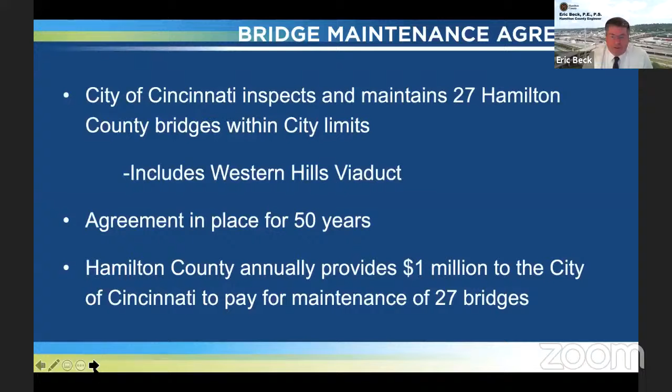This major infrastructure project creates jobs, impacts growth, and spurs development, not just on the west side of Hamilton County, but to all the residents of Hamilton County and the tri-state area. This project is a great example of good governance. When we work together, the outcomes benefit all. The Hamilton County Engineer's Office has a long-standing relationship with the city's Department of Transportation and Engineering. Part of this relationship is an agreement to commit $1 million of municipal road funds annually to 27 bridges within the city of Cincinnati. One of these bridges is Western Hills Viaduct.

Some of the projects that have been recently completed with this relationship are the 8th Street Viaduct, Marburg Avenue Bridge, and Kennedy Avenue Bridge. Tonight, we're here to update you on where we stand with the Western Hills Viaduct project. It is the largest project my office has undertaken, both in complexity and cost. Comments from previous public hearings, as well as those from our other partners, the Ohio Department of Transportation, the railroads, and public utilities, have also weighed into the decisions made in getting the design to the point that it is now. I would like to stress that the images you'll be seeing are just renderings at this point. During the final design, there may be changes made for any number of reasons, including potential input received as a result of the meeting tonight. Again, thank you for being here.

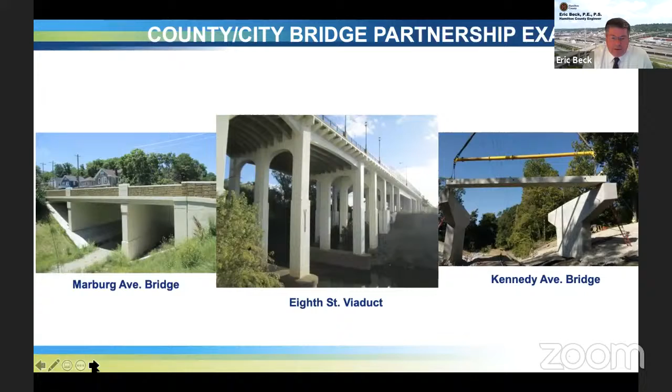And now I'd like to turn it over to Bill Shefcik to discuss the details of the structure. All right, thank you, Eric. Hope everybody can hear me, and good evening. Thank you to all who are participating tonight. So in our presentation, we'll be talking about a few things. First, I want to touch on the current condition of the viaduct. Second, we'll talk a little bit about the history of the project and the status of the project where it is today.

Third, we'll be talking about the recent study done by our consultant, T.Y. Lin, to determine the best bridge type to replace the existing viaduct. And finally, we'll talk about what's coming next, like status of funding, and then we'll be here to answer any questions you may have.

So to start with, we'll talk about the condition of the viaduct. The first thing I'd like to say and stress is that the viaduct is safe for the traveling public. Our intention is to keep the viaduct safe and operational until we can get a replacement structure in place. We are vigilant in performing inspections and doing maintenance several times a year to ensure the safety of the viaduct and the traveling public.

Recently, there were weight limits posted on the viaduct, which are restricting very heavy trucks from using it. At this point, it's only heavy trucks. We're not reducing any buses or any other normal truck traffic, even semis. It's just the very heavy trucks that are limited to use the viaduct.

Shortly we will be installing some netting on the viaduct over the lower deck to help catch debris from falling onto the lower deck. So the viaduct is considered to be in poor condition. As many of you probably know, it's 88 years old. It's at the end of its useful life, and it needs to be replaced.

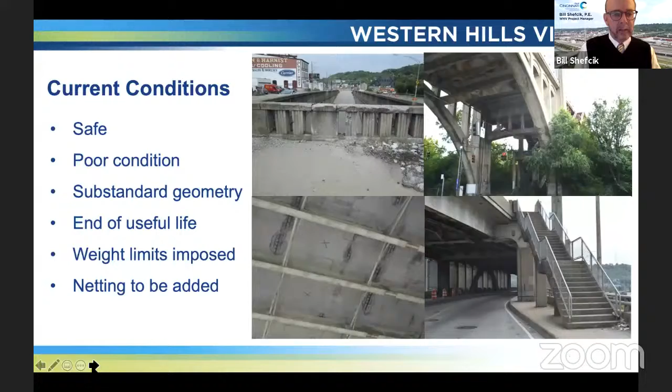So a little bit about the history. Back in 2010, the city and the county began planning on how to address the issue of the aging viaduct. Following 2010 and over the 8 years following, considerable study was made with input from the public and key stakeholders to decide what to do with the viaduct. At the end of that study period, it was decided that the best option was to replace the existing viaduct with a new bridge immediately to be constructed south of the existing viaduct.

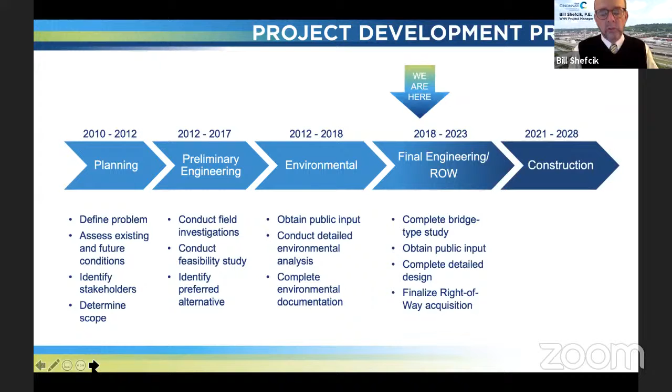The timeline we're showing here on the slide shows where we're currently at in the life of the project. And as you can see right now, we're in the final engineering, final design phase of the project. So I'd just like to say, although no physical construction has started yet, there's been a lot of good work done to date on the project, including our pursuit of funding, which I'll speak about a little later in the presentation.

The new bridge will be constructed approximately 50 feet south of the existing viaduct. By constructing the new bridge to the south, it allows the existing viaduct to remain in place and open to traffic for the majority of the bridge construction, reducing impact to traffic and inconvenience to the traveling public while the new bridge is being constructed.

The new bridge will be a single deck with 4 lanes of traffic in each direction. There will be an 8-foot sidewalk on the north side of the new bridge, and a 14-foot wide shared use path on the south side. At the west, the shared use path will connect into the new path constructed as part of the MSD Lick Run project. There will also be a connection with the shared use path down to State Street. At the east end, the shared use path will connect directly with Central Parkway.

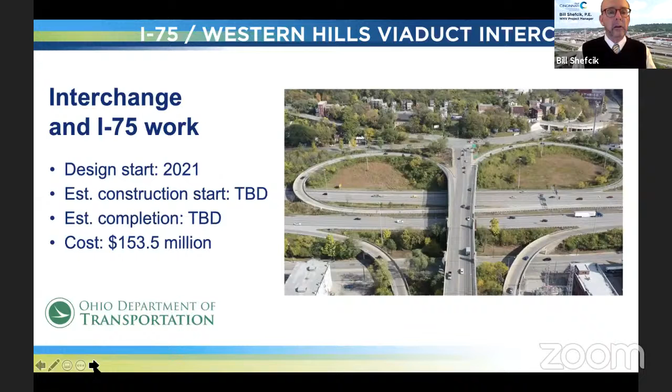The most recent activity on the project: an engineering study has been conducted to determine the optimal bridge type to replace the existing viaduct. The study was performed by our consultant, T.Y. Lin International, with significant collaboration and input from the city, the county, ODOT, the major railroads, and utilities affected by the project. The result of the study is that the selected bridge type is an extrados type bridge. Determining the bridge is a milestone in the life of our project, we think.

And here to talk more about the study and the proposed bridge, we have Sajid Abbas from T.Y. Lin. At this point, I'd like to turn the presentation over to Sajid. Thank you, Bill. Good evening, and thank you all participants for making time to attend this meeting. I am Dr. Sajid Abbas, Project Manager for the Design Consultant at T.Y. Lin International. Next slide, please.

One of the primary challenges in this project is to span over the Queensgate rail yard without causing any significant interruptions to the railway operations. Queensgate rail yard, operated by CSX Railways, is one of the largest rail yards in the country. It receives freight trains, which are then classified and assembled in the classification yard. Locomotives are serviced and refueled, and assembled trains are then stored on departure tracks and released based on a predetermined schedule.

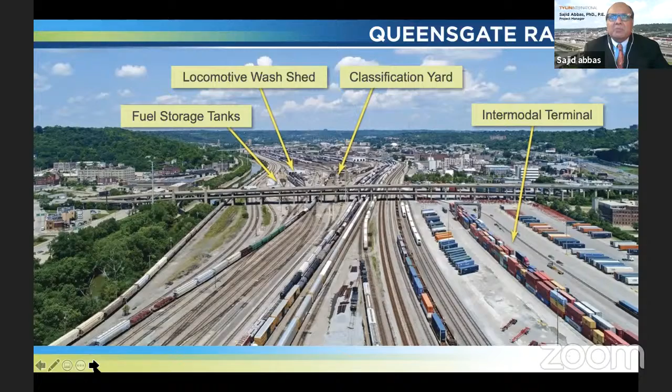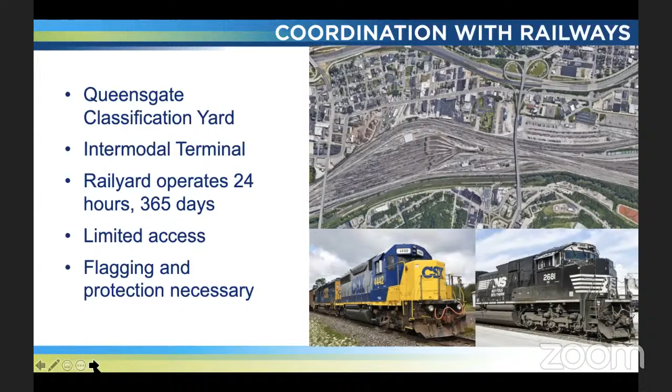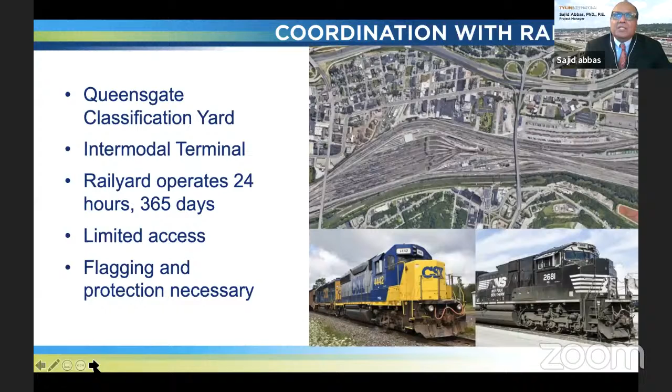At the top right corner of this slide, you can see an image of the immense expanse of the rail yard. Western Hills Viaduct is at the southern end of the yard. CSX Railways operates the rail yard, and Norfolk Southern operates three tracks that go through it. The rail yard operates 24/7, all 365 days of the year. Construction access over railroad tracks is limited to short time windows, which has a direct impact on the type of bridge that can be built across the rail yard. Next slide, please.

As Bill mentioned earlier, the selected bridge type is the extrados bridge. Let's talk a little bit more about the various bridge types considered for this project and the evaluation criteria used to make this selection. We looked at several families of bridges. These included bridges which are fully assembled next to the rail yard and then launched across the tracks using self-propelled motorized tractors—this would be the arch bridge.

The next family is bridges assembled in short segments of 60 to 90 feet and then incrementally launched across the rail yard. This would include the truss and the trapezoidal steel box. The next family is bridges which are built in cantilever—no false work is required in the rail yard, and all construction is from the top using form travelers. This would include the extrados, segmental concrete, and cable stay bridges.

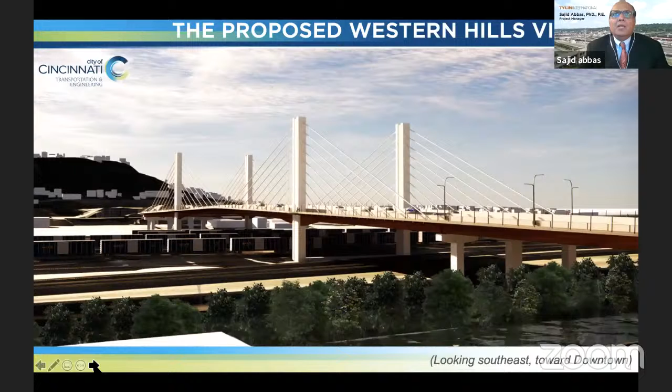This is a view of the bridge looking southeast towards downtown. As you can see, the main bridge has 4 concrete towers. The total height of the towers from the ground is about 150 feet, and above the deck about 100 feet. There's a harp pattern of cable stays on the bridge. It looks quite elegant, in my opinion. The superstructure consists of steel longitudinal box girders and transverse floor beams with a composite concrete deck on top.

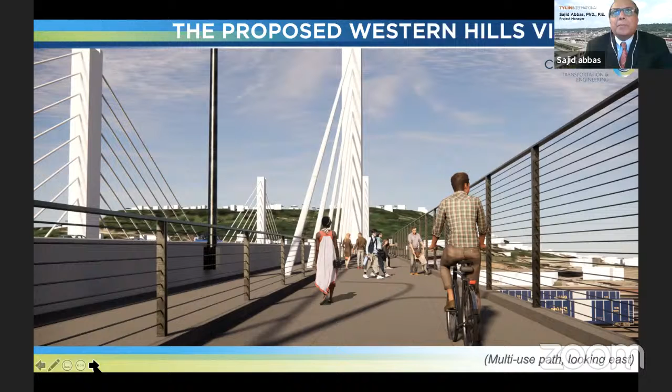Okay, thank you very much, Sajid. That was very good. So, going forward on the project, next slide please.

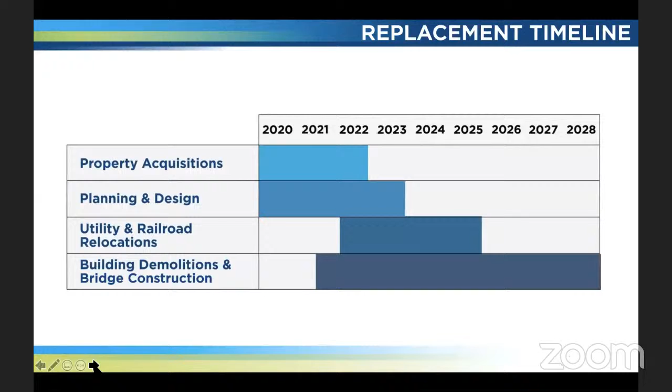Now that we have a preferred structure, we will continue on the detailed design. In tandem with design, we will continue working on necessary property acquisitions for the project, and we'll be moving forward with relocation of Duke Energy electric transmission lines and substation, and relocation of a railroad track within the railroad yard, both necessary for construction of the bridge. Construction activities will start as early as 2021 at the west end of the project, with building demolitions, site preparations, and potentially early bridge foundation work. We are planning on putting out a bid to start the work next year.

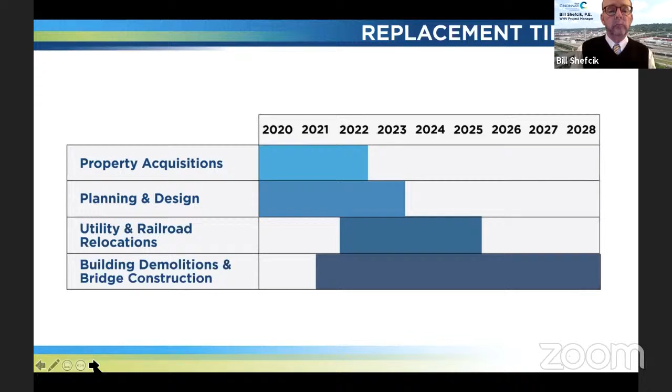As stated previously in the presentation, the current estimate to replace the viaduct is $335 million. The city and county have been aggressively pursuing funding, and to date we have more than 1/3 of the amount needed to replace the viaduct, with the majority of that funding secured over the last 2 years.

Given the momentum on the funding we've received already, we're confident we're going to be able to secure the remaining dollars needed for the project. We continue to pursue every avenue of funding available, including the potential funding sources listed on the slide here.

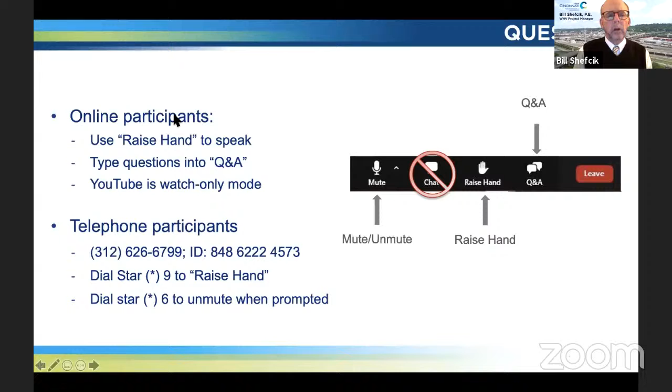Laura, I don't know if you can go back into the presentation and show that plan of the viaduct. Yes, bear with me a second. Sorry, it's being a little slow this evening. There we go, there we go.

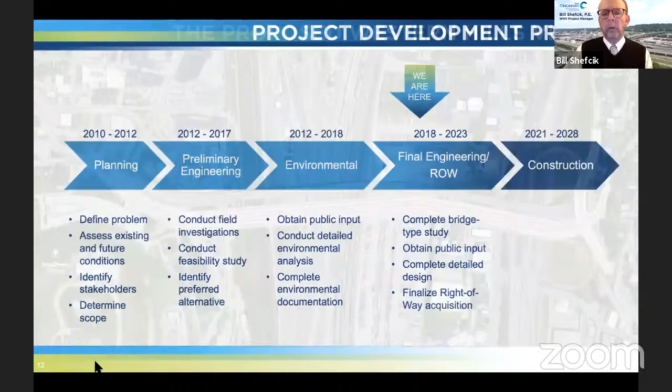Okay, our next question is from JT Punt. The question is, will there be exits to State Avenue and Harrison Avenue on the west side of the new bridge?

At this point, there is not a roadway connection. The only connection we are planning now is the pedestrian and bike connection from the shared use path down to State Avenue.

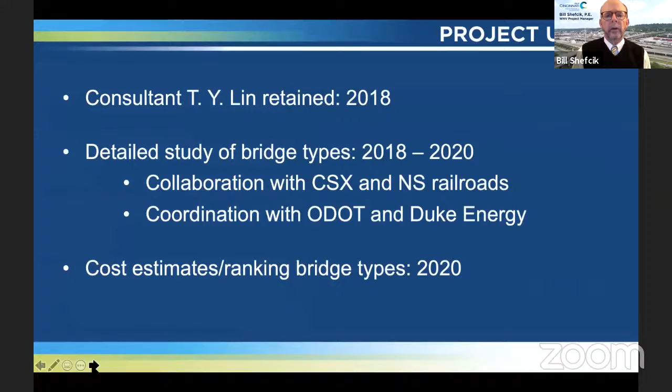Okay, so I'll start off on the lifespan. We're looking at trying to build a structure with an extended life, 125 years or more, hopefully. We're looking at different options as far as stainless steel for the rebar, high performance concrete, anything we can do to limit future maintenance and make the bridge as maintainable as possible and long lasting.

And the other question - Laura, can you repeat? Actually, bear with me a moment. Sorry, I didn't catch that.

Will 8 lanes be sufficient to carry future traffic? There's not a significant amount of growth anticipated in the area as far as traffic volumes. Currently the existing viaduct has 4 lanes on the upper deck, 4 lanes on the lower deck, and between those they're sharing the traffic coming from the interstate and the local road network. So we do feel that 8 lanes will be sufficient for future traffic volume.

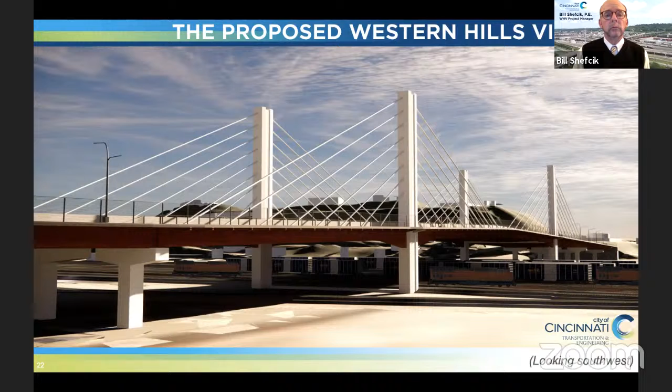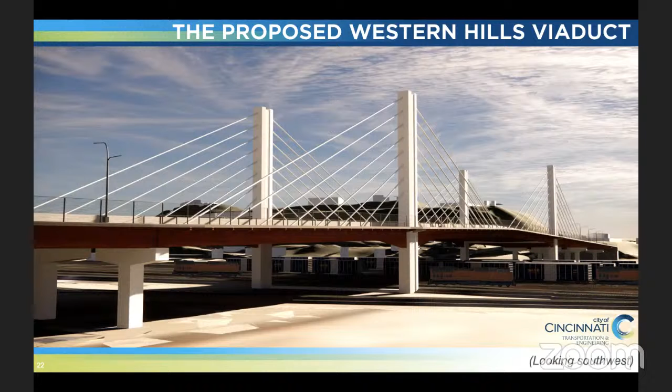Sure. Going back to, you had a good overhead view of the project, and I apologize if I missed this somehow, but on the west end, it seems kind of sudden the way the project ends. So how will that ultimately resolve itself, with some future roadway plan? In other words, obviously all the cars don't stop there, they have to go somewhere.

Dave Wormald sent in a question - he thinks it may have already been answered. Is the Greater Cincinnati Waterworks actively working to design the relocation of the water main on the Viaduct and Central Parkway, and will this be done prior to the Viaduct project itself? I believe you already answered that verbally, correct? Yes, that was answered.

Greg Lang has a question regarding one of the renderings - he says you are showing concrete dividers between the two pairs of eastbound lanes, along with the two pairs of westbound lanes. Would there be dividers between the east and westbound lanes?

There's not intended to be a divider in the middle, if that's what the question is. I believe that was the intent of the question. Yeah.

Dinesh would like to know, can you give us a brief overview of the foundation? Is this a pile foundation, and does the vibration from the rail traffic affect the foundation design? Thank you.

Sajid, I'm going to turn this one over to you. Thank you, Bill.

Dinesh, we are thinking about using drill shafts over here. These are large diameter, 6-foot diameter concrete piles that we would be placing in the ground. So these are drill shafts. You basically drill a hole into the ground, and then you use a casing to hold the ground back. You place a rebar cage in there, you pour concrete in there. So a couple of benefits over here.

We are not going to be driving any piles, at least at this point. We are not visualizing that for the main foundations. And so that would prevent any vibration affecting the rail tracks. And if we are drilling, it's not going to affect any structures around as well, because that does not cause vibrations. So it's the appropriate method for this site. It works for the railways, it works for us, and I think it will work for the neighborhood also.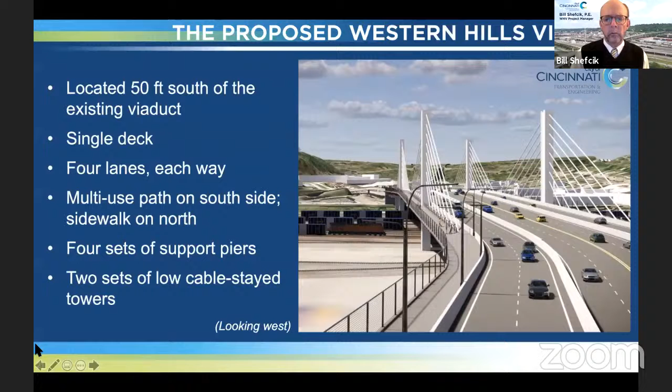Sure, I can start that, and maybe Sajid you can fill in. We did as much as possible try to put a straight span across the railroad yard. So the long span with the towers, that's supported by the towers and the cables, essentially that is the straight portion of the bridge. In order to tie into the existing road networks at the west and at the east, we did have to introduce some curves in the road. So it's really mainly the environment and the roadway network, and what we're tying into at each end, that dictated the alignment of the new bridge and roadway.

And Sajid, I don't know if you want to add anything to that. I agree, Bill, with your answer. I'm just saying if we try to straighten it out towards the south, the alignment would go over the intermodal yard, and the railways do not like that. And if we were to try to straighten it towards the north side, we would be interfering with the existing viaduct, and we need to keep the existing viaduct open to keep traffic running during construction. So there are constraints which pushed us in this direction.

But a curve can be nice. I mean, if you are driving on a curve and coming onto a cable stayed bridge, you can basically see a changing view as you drive. You can look at the whole expanse of the structure. So it can be fun. Thank you, Sajid.

An unidentified person said it sounds like you are not sure of the ultimate cost, yet you say it is worth it. How do you justify that position without data in hand? So the ultimate cost, as far as we have a number where we believe we can build the entire project within $335 million. We have done cost benefit analysis that has shown that, building the viaduct at this cost, the benefit cost ratio is 4 to 1. So we have done the analysis on that.

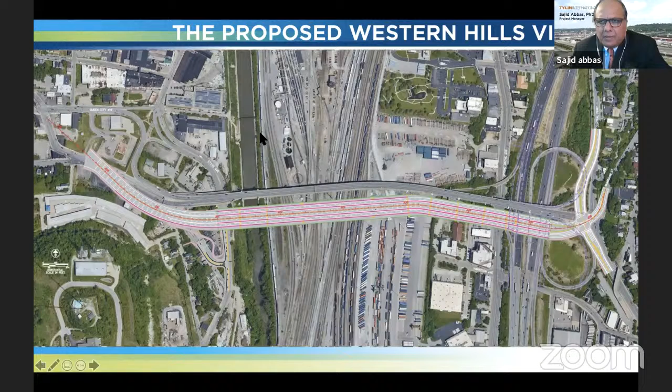Kate asks what the plans are for the land remaining when the two large cloverleaf ramps are eliminated. Right now there is no plan.

A similar question from Tony Walsh: the parkway appears to be moved to the west—is there a plan for the unused property from the existing parkway? Once again, there's no plan on that yet.

Does the city need to pay for the property for the new bridge? There will have to be a new easement established for the new bridge. Currently, the existing bridge is over railroad property and it is there through an aerial easement. Most likely we'll have to pay for the increase in easement area for the new bridge, but that dollar amount has not yet been established.

Will the construction of the bridge and approaches begin in 2021, or will it just be the adjacent support work like local roadway realignments and the like? If so, when in 2021?

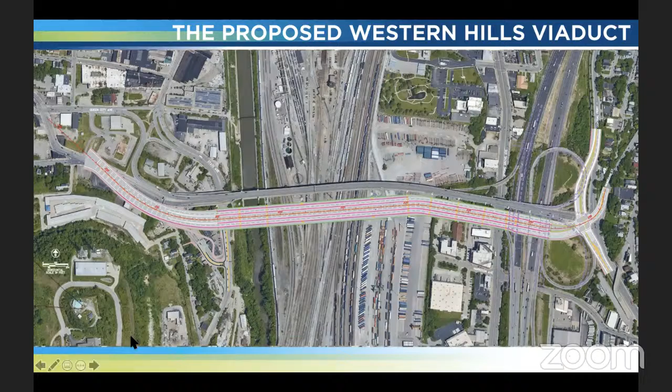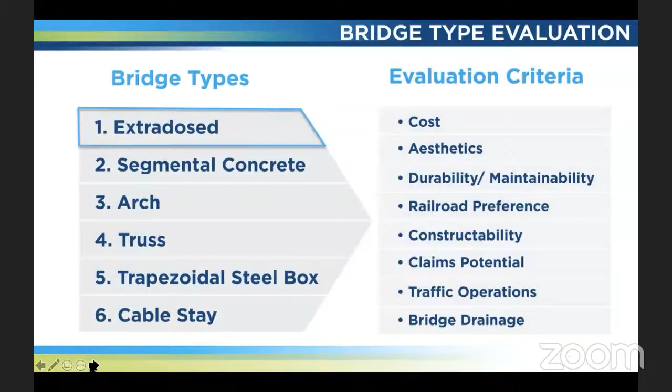Laura, if I may, can you please read the comment from Greg Lang over there? I'm very interested in his comment. He says, excellent report with alternates and great presentation. Thank you for sharing. Thank you for the comment there.